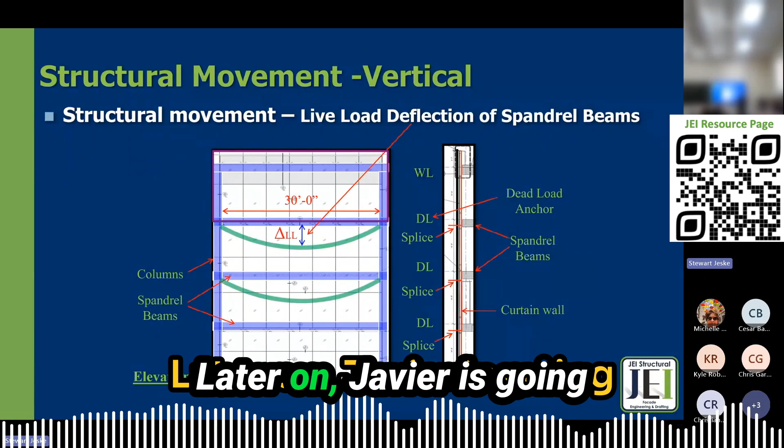Our glazing systems have got to be able to accommodate that type of vertical building structural movement. Later on, Javier is going to get into lateral building structural movement and some of the issues associated with that, and limitations of manufactured systems.

This is one of the areas where we can see that in this slab, somebody has done a good job of showing that at the edge, there is deformation. So if we have sticks in there for that—I think this was a Kawneer reference—you can see out in the middle, it might be deflecting. If this is 30 foot, out in the middle it may be deflecting up to an inch.

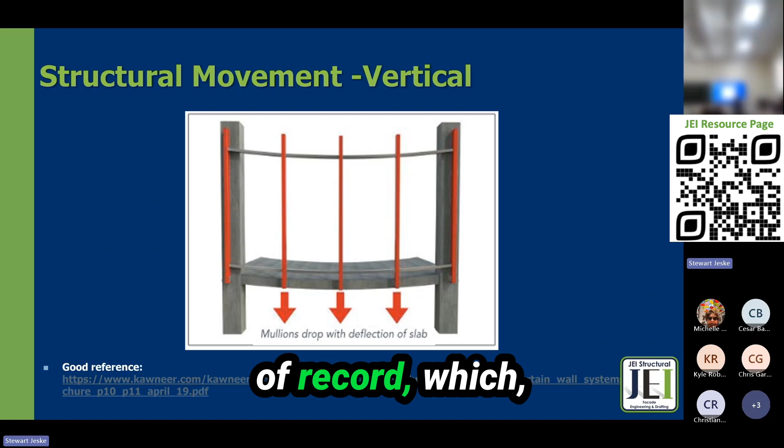That's what structural engineers of record designing buildings are allowed to design, and it's called L/360. Unfortunately, a lot of the glazing systems are not really designed to accommodate those types of movements. The structural engineer of record—that's my background. I came from Burns McDonnell, one of the major players in structural engineering around the world and in the US, and I spent 7 years designing building structures. I was clueless about any of the requirements from manufactured glazed systems and what they require in terms of accommodating that building structural movement. Had no clue about it.

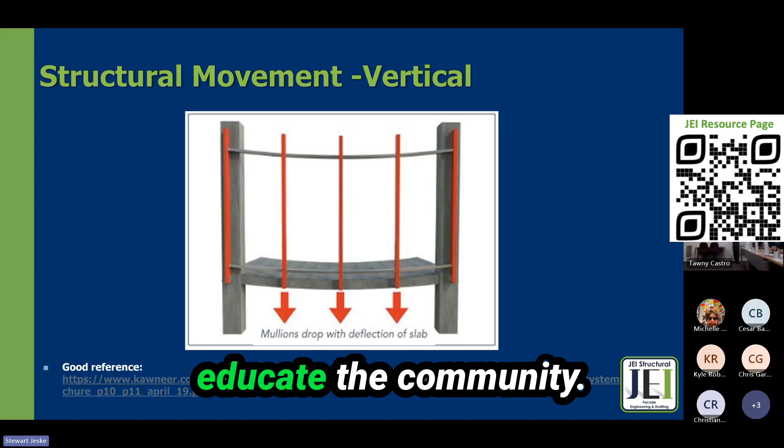So I'm letting you know, building structural engineers around the US, we've been in this battle. We engage in it to try to educate the community, architects and structural engineers and glazing contractors about the limitations of glazing systems to accommodate that.

So if we have a vertical structural movement of that beam where everybody runs over and it moves down, we have dead load anchors at every single floor. That means that this whole section of curtain wall that is supported by that dead load anchor all has to move down 1 inch. If it's a 30-foot beam, the structural engineer of record may have designed for L/360 for that 30-foot span. It may be 1 inch.

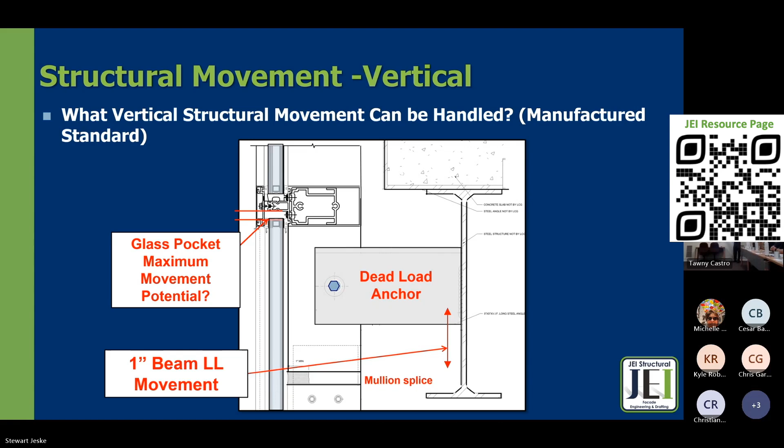So we might be able to accommodate it in that expansion splice, but what is the actual limitation associated with the glazing pocket? That's a big key. So for a stick-built system, does anybody have an idea of what that limitation might be for a standard off-the-shelf stick-built system in terms of structural movement accommodation? Half inch, 3/4—good guesses. It's actually a 1/4 of an inch.

This is the standard of every single stick-built manufactured system that is out there. They don't spell it out on the websites. It's not spelled out very much at all. It's something that you really have to dig for in small print to find out what the limitation is. So let me tell you right off the bat that if you have a dead load anchor at every single floor and you're counting on this to be able to accommodate 1 inch of movement, that's not happening. It can't happen. This is the big misunderstanding of structural engineers of record, architects, even glazing contractors, and a lot of manufacturers. It's not matching up.

We're trying to help in the industry get this information out there and make it available to project managers like yourself so that it doesn't get in the way in the future of the project. For unitized, it's much different because at each floor there's an area where we can accommodate, and that's much more movement that it can accommodate—3/4 of an inch up to 1.5 inch of vertical structural movement.

In addition to that, it's much better for in and out of the page lateral structural movement that Javier is going to talk about. But if we're not dealing with unitized, then we're stuck with what the manufacturer has in terms of being able to accommodate, and that's a 1/4 of an inch. All their details, even their head details, where you see a half an inch joint, it can only compress that joint to 1/4 of an inch. So all those standard details that you get off of their websites are built for 1/4 of an inch maximum structural building movement. This is a quote from a manufacturer.

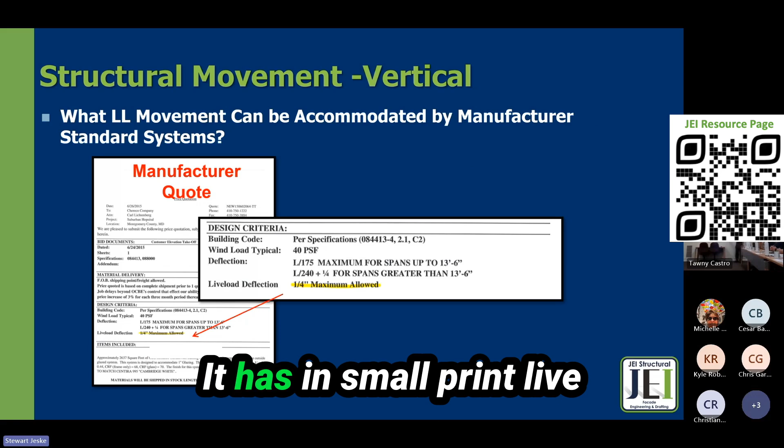It has in small print, live load deflection, 1/4 inch maximum allowable. This is off their shop drawings. One of the manufacturers has shop drawings with notes in the small print stating it's not to exceed 1/4 of an inch. It's out there, all of them are prevalent with a 1/4 inch max.

So what are the solutions that we can offer from an engineering standpoint to accommodate building structural movement with a stick-built system? We can stack the system. These joints that we have in there, the splice joints, become butt splice joints. They carry load vertically down through, all the way to the bottom or an anchored floor. We can do this for probably about 3 to 4 stories before it becomes too much load to handle.

All this needs to be coordinated with the building structural engineer of record because they need to plan on what those loads are where we're stacking it. It might be the 4th floor that we stack on and load, so they need to know what those loads are. What it also means is up at the top, it can expand all of that distance into whatever we have available to make that movement happen. We need to really plan for that joint up there because it's going to gain a lot of expansion from building structural movement. If it's a roof, that roof is going to move up and down for those roof beams as well.

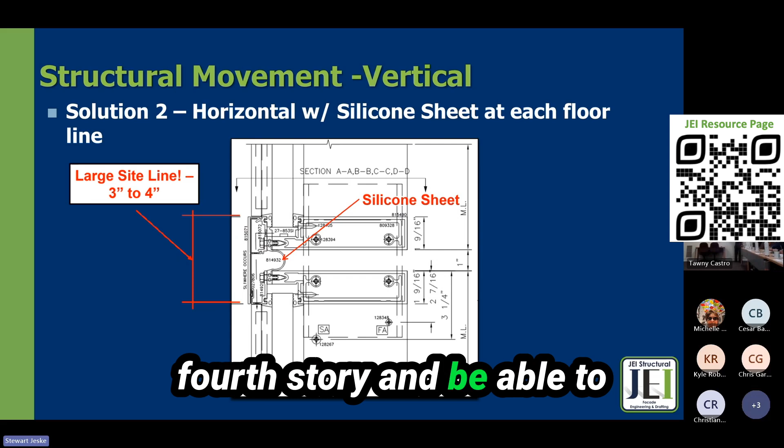One of the additional solutions we've found along the way is some manufacturers of stick-built systems are starting to understand the problem. So they're coming up with hybrid types of joints to use every 3rd or 4th story, accommodating that building structural movement with a flexure type of joint, a silicone type of seal. But this is really unusual, and you have to dig for those types of details if you have a problem like that.

So for unitized systems, it's very easy. Like I said, you can dead load at every floor, and it can accommodate that type of movement. What about at the head?

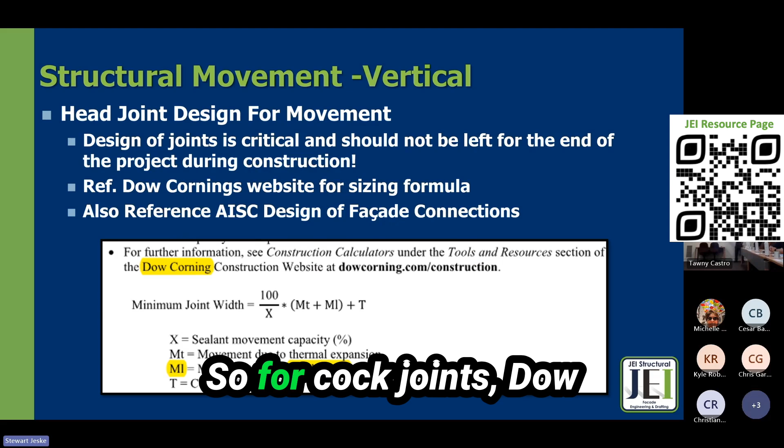So for caulk joints, Dow actually has a formula for calculating the actual width and thickness for that type of building structural movement. Ultimately it works out to be about 2 times the movement. So on a 30-foot beam, we have 1 inch of deflection because the structural engineer of record didn't know the limitations of a glazing system, and 1 inch is the amount that joint wants to move down. You would have to design a caulk joint of 2 inches to accommodate that in compression so it only compresses 50%.

The architect isn't going to accept that. And that's part of the issue we have to get into early on a project, to show that there's got to be some different solutions worked out for building structural movement. It's the number one misunderstood area associated with glazing systems and manufactured glazing systems.

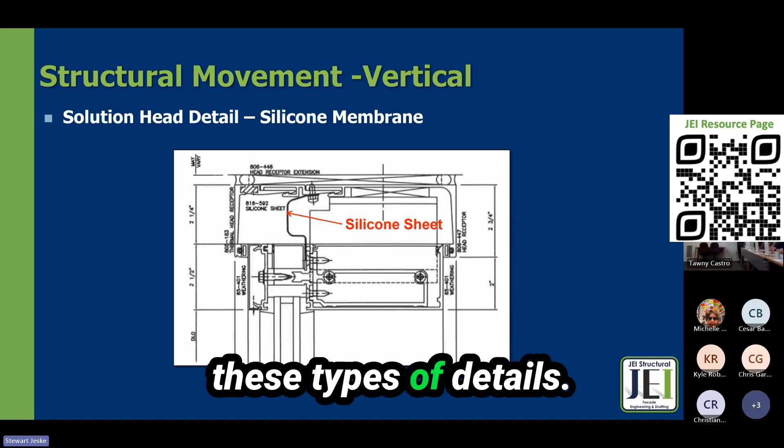Another option is Emseal. That can be used, but it's very expensive to use EM seal in those large movement type joints.

So what about storefront? What are the limitations associated with standard off-the-shelf storefront systems? This is a 21 foot 4 inch long area of standard storefront. Does it require a movement joint at the head? It looks like this, with hard shims at the top. Does it accommodate building structural movement? Does it accommodate this steel and the cold form steel coming down on top of that?

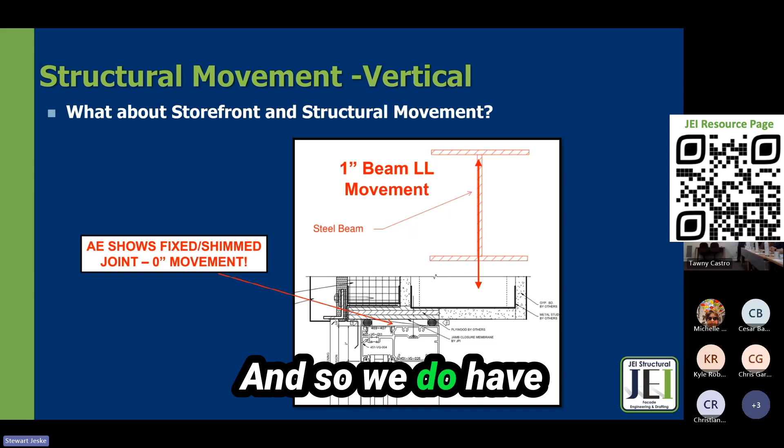No. The architects always show this detail with just standard tight shimmed conditions without understanding that it's got to accommodate building structural movement 95% of the time. So we do have some rules of thumb that we've developed.

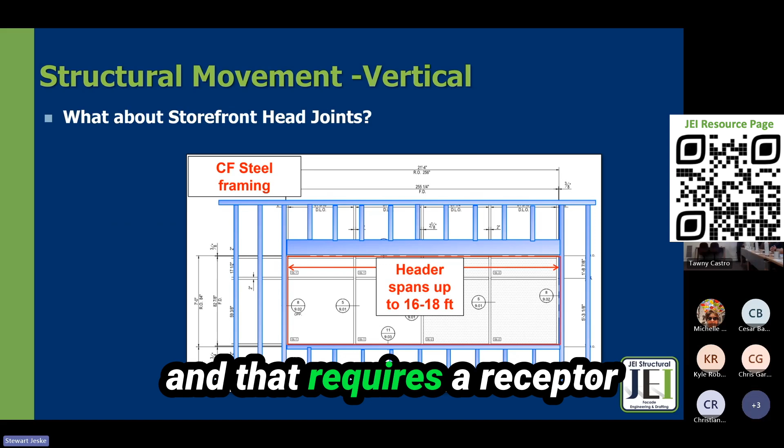This is an instance of cold form steel framing. You can see there's a header that spans across. The maximum span for cold form steel headers is about 16 to 18 feet. So anytime storefront is longer than that, underneath or in the middle of cold form steel, it has to be supported off of a beam above that moves, and that requires a receptor head for your storefront.

This is one of the conditions we see very often, where storefront comes in up underneath a beam that supports some frame out. This requires some type of movement accommodation. Unfortunately, it's not shown right—it's shown solid by the architect, and that's in error. It does require a receptor head at that location.

A receptor from a manufacturer typically ranges in capability of handling building structural movement, usually about plus or minus 3/8 of an inch. That's the maximum amount a receptor can handle.

So again, whenever we enter a situation where a structural engineer of record has designed a 30-foot long beam for L over 360 and we have 1 inch of movement, will a receptor accommodate that? It's not going to accommodate 1 inch of downward movement. So something needs to happen up front, early on in the project, to get attention to that issue. Otherwise, we can have major leaks.

If there is that actual movement, where people come over to the edge and are all looking out, it will be an immediate item where something will break—a seal will break—but then people go away, the live load goes away, the seal is broke, and people are running around thinking, why is it leaking? We don't understand what's happened. The problem was it wasn't designed right—it wasn't designed for the building structural movement. Almost 90% of the time, that can be tracked back to an improper design.

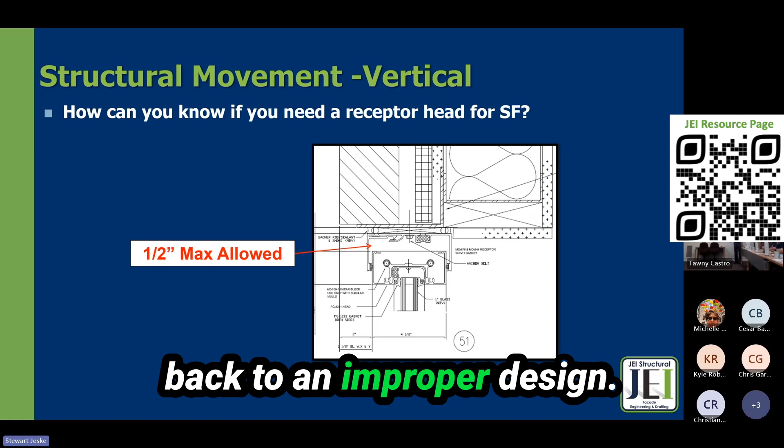Some rules of thumb for storefront receptors: if there's a canopy overhead over that storefront, most likely it needs a receptor, because that canopy is going to receive a lot of loads and move it back and forth. If the opening is longer than 18 feet in horizontal area, its vertical movement requires a definite need for a receptor head.

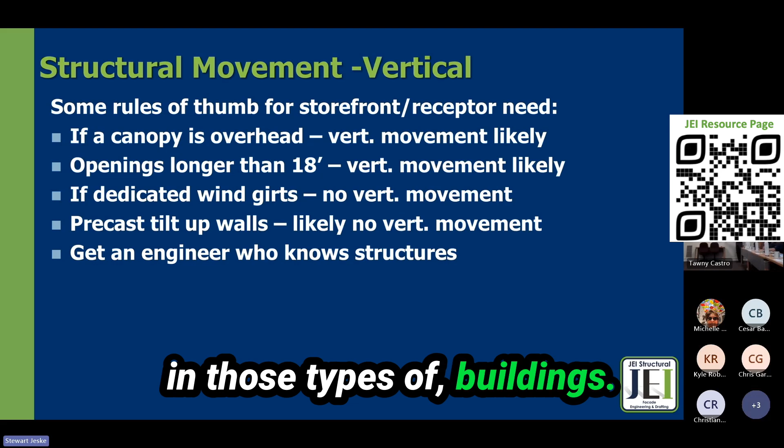If it has dedicated wind girts—in other words, a beam that is just supported without supporting the floor, that's a wind girt—it does not need a receptor. Precast tilt-up walls, you don't have to worry about receptors in those types of buildings. Ultimately, an engineer really needs to be looking at this from a structural perspective: what did the structural engineer of record for that steel building or concrete building design for? If it's not spelled out in the structural notes, it really needs to be investigated.

So with that, I'm going to go ahead and turn it over to Javier. He's going to talk to you about lateral structural movement.

Thank you, Stewart. Sorry, I think I advanced. There you go. Can everybody hear me all right?

Yes. So, for story drift, the West Coast is the highest seismic area in the United States, and part of our delegated design review includes making sure that when there is drift during a seismic event, our curtain wall can accommodate this drift without causing the glass to fail.

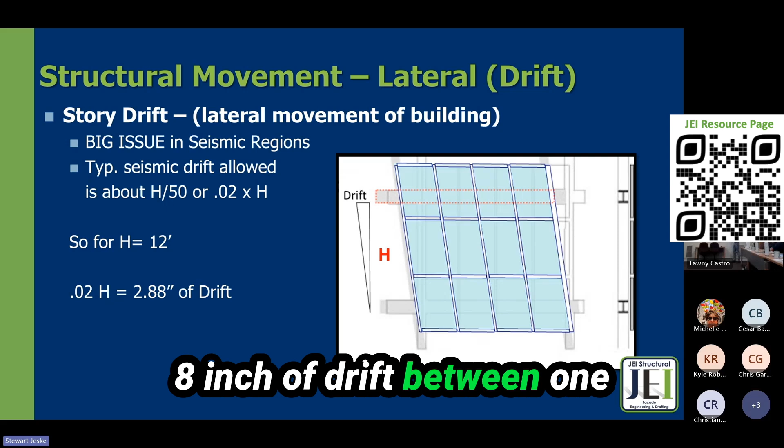The building code allows about 2% of drift from one story to the one above. It depends on risk category and the type of construction we're installing the curtain wall on, but 2% is a very common number. So for a 12-foot high interstory height, you would expect about 2.8 inches of drift between one story and the one below. So what does that do to our glass?

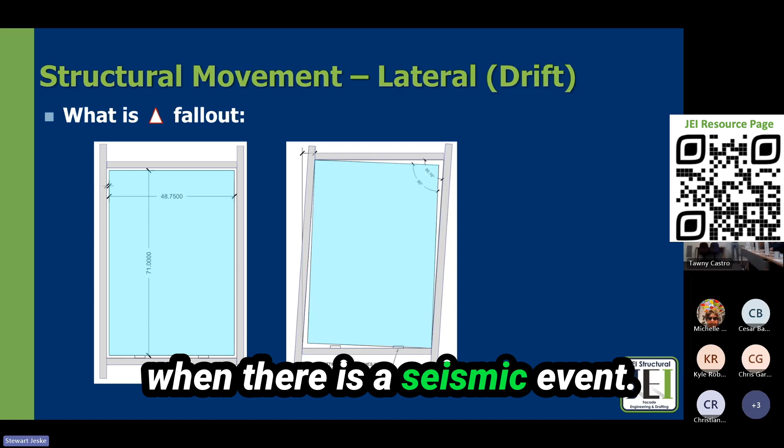Like this. So our review needs to make sure the glass doesn't come in contact with the aluminum frame when there's a seismic event. The reason behind that requirement is that if it does, we run the risk that the glass might shatter, break, and become a falling hazard to people outside on a walking surface.

The ASCE 7, which is basically the Bible for loading in the US, has in Chapter 13 the equations and requirements for us to check this delta fallout requirement. There are locations where you could be exempt from that requirement. Again, making sure that this big piece of glass doesn't fall, break, and fall into a walking surface is what the ASCE 7 is trying to achieve.

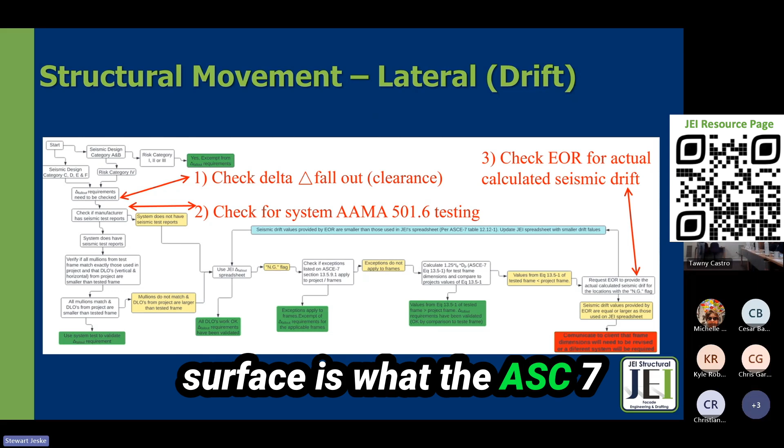At JEI, we have put together a very comprehensive flow chart, and it might be daunting to see this, but it's a very comprehensive approach to how we help our clients flag and tackle some of the high seismic areas as glass is getting bigger and bigger in locations where you might have 3-4 inches of drift. Stories are also getting taller. This flowchart was shared with a group of other structural engineers and PEs here in California, and it was validated.

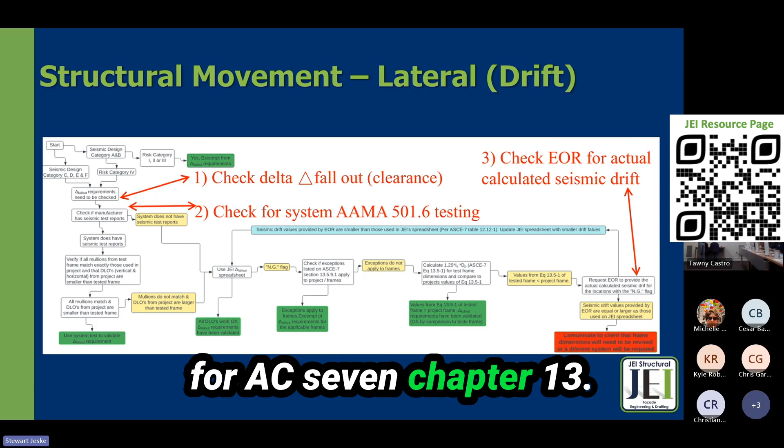We had the pleasure to talk with one of the committee members that sat on the committee for ASCE 7, Chapter 13. He told us this is basically the best way forward to tackle it. It's such a young industry, the glazing industry, that the seismic requirements are quite young. So it's upon the delegated design engineer to make a lot of judgment calls on these cases, but there is progress on the codes, and it's becoming a more prescriptive approach.

This allows us to take advantage of the testing that is done on a lot of the systems that are manufactured. I'll show a video after this slide in which a frame is tested laterally and racked dynamically. If there's no glass that either breaks or falls off the frame, then the system is good.

The problem is that many times on a project, the sizes of glass, the DLOs, are quite a bit larger than the tested frame, or the mullions might be slightly different. So if that's the case, we can't really extrapolate the results of the test. We have to find more creative ways to validate that glass.

JEI has internal equations that reference the ASCE code, which we use to prove out, based on equations, if the size of the glass has enough clearance around the perimeter to allow the frame to deflect without the potential of the glass coming in contact with the frame.

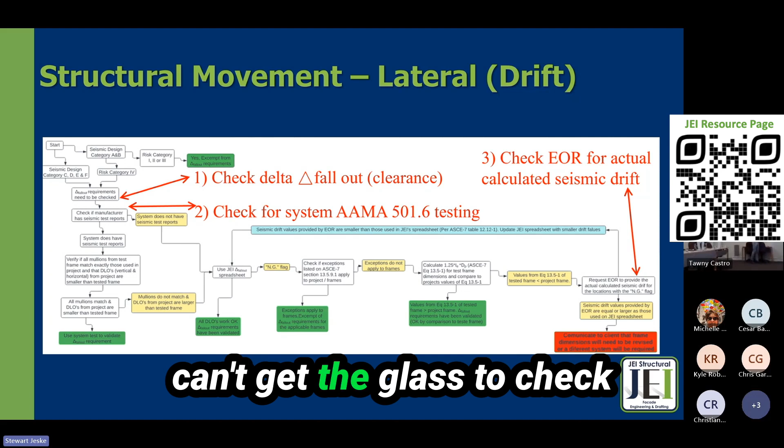If for whatever reason our glasses are too big and we can't get the glass to check out, we have yet another set of creative approaches to engage other types of equations to prove it out. If all else fails, we have a template of an RFI that we can send to the structural engineer of record and ask them how much drift this part of the building is really seeing.

There have been times that the response was, yeah, we have allowed a 2-inch floor drift in this location. But there might be other times that this particular part of the building is quite more rigid and it's not going to drift as much. That RFI basically gives us a thumbs up to proceed with those sizes of glass.

A couple of exceptions I have seen to proving out a very big piece of glass: if the glass is installed 10 feet or below a walking surface, we don't need to worry about it. Because imagine if this big piece of glass breaks during a seismic event and falls from the frame, it's not really going to hurt anybody walking.

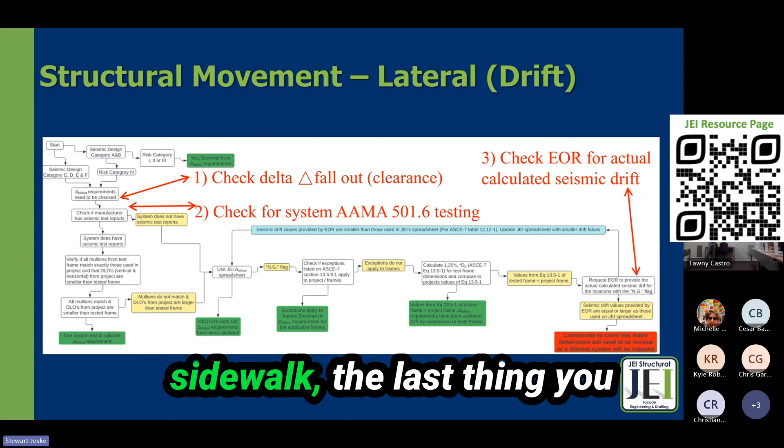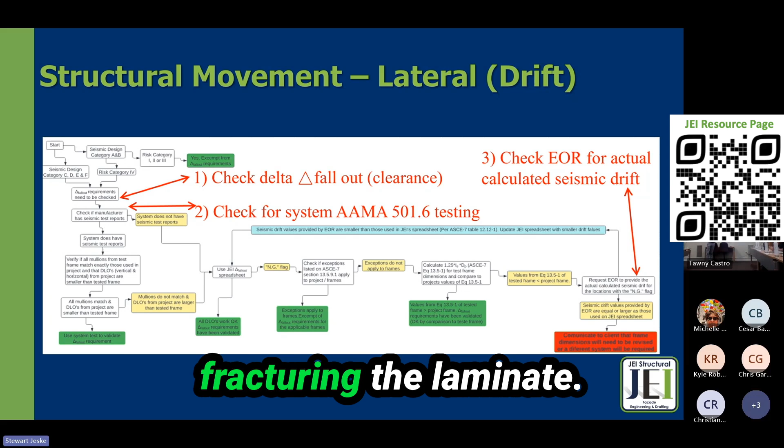But if you have this piece of glass 3 stories up right outside the sidewalk, the last thing you want is people rushing out of the building during a seismic event and then having glass raining on them. We really don't want that. Another solution would be to use a laminate, outboard or inboard. That way, if the glass comes in contact with the frame and ends up fracturing, the laminate captures the glass pieces in the frame so you don't have that falling debris hazard.

This is the AAMA 501.6 testing that a lot of the big manufacturers use to test their systems, and I'll play this.

0.6. That's 0.6. Oh, no. 0.4 is static. 0.6 is dynamic. Might have to. Oh, do it from there. Oh, there you go.

Unitized systems have a lot of advantages for this type of movement, and I'll share that slide in a little bit. But here's a video of that test.

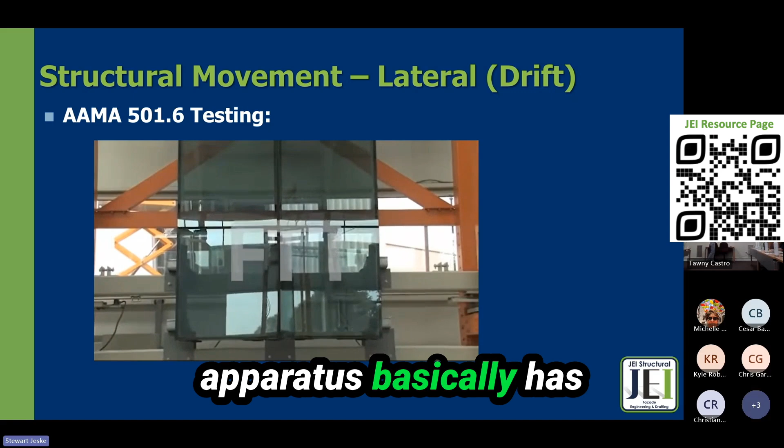You can see the testing apparatus basically has one part of the frame static while it racks the other one, because if the whole building moves equally, there's no differential displacement. It's the differential displacement that really causes problems with the glass.

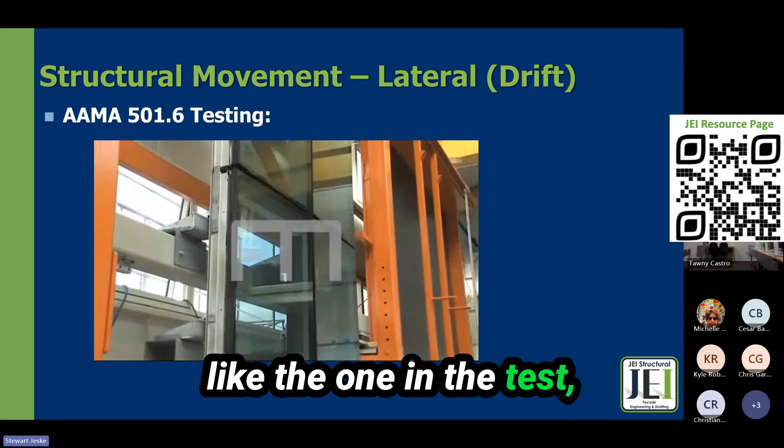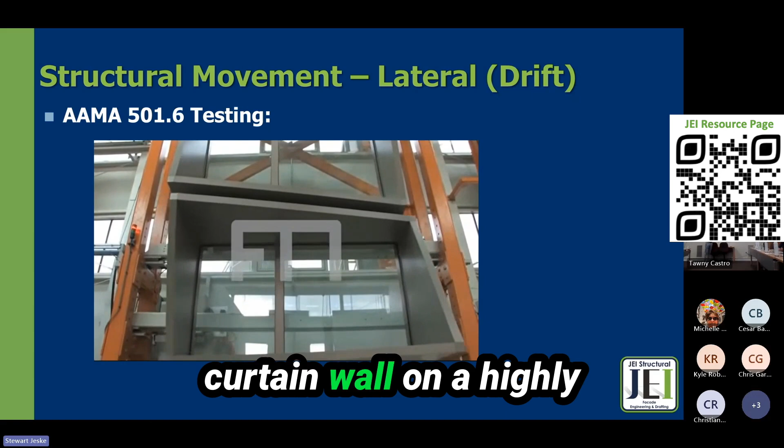I want to add that SSG systems, the ones that are not captured like the one in the test, there are very limited equations and analytical approaches we can take to validate those systems. Most all SSG curtain walls have to be tested for us to validate them. Whenever we see an SSG curtain wall in a highly seismic area, one of the first things we help our clients with is requesting test reports for those SSGs, because without them, there's really not much we can do on the analytical front.

Like a 4-sided SSG, correct. If it's captured at the head and sill, some mullions on the verticals do have a little tongue, and at the bottom they have little chairs that hold the glass. But what's preventing the glass from coming into contact with the other piece of glass is a silicone joint, many, many times. So those would need to be tested as well.

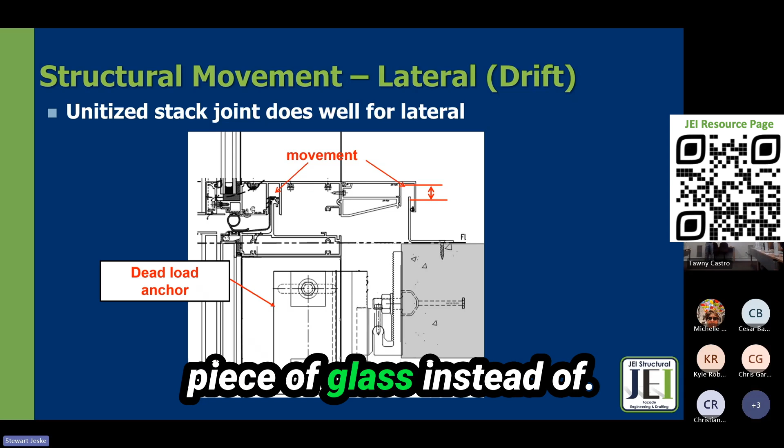For a unitized system, like Stewart mentioned before, the drift of the unit above it is not going to engage the unit below it, so it can slide with respect to the unit below. This is one of the great advantages of unitized systems in highly seismic areas: each panel can deflect without engaging the one below. Thus the big glass remains square and just rides along instead of being crushed by the rhomboid shape of the aluminum.

A slightly different topic - you want to talk about the genesis of the fins? You've had a project with some fins that occurred. Here's an issue I've seen from my years in the glass and glazing industry: manufacturers started out not envisioning anything that looks like a sail hanging off a curtain wall. They didn't start that way.

This concept was developed from architects wanting to add certain shade into the building, and they did it without really consulting the manufacturers. Ultimately, this is a big sail. Whenever you add these things on, each mullion collects wind load from that sail, and it wants to move laterally, which bends the mullion in the weak axis along that connected axis.

Usually in the specs there's a limit for the contract that it only deflects L over 360 of the clear span, or an eighth of an inch. So if you have a 12-foot tall mullion, it can only deflect laterally 1/8 of an inch due to this wind load pushing on each one of them. This creates a nightmare from the engineering standpoint, so that the glass doesn't break.

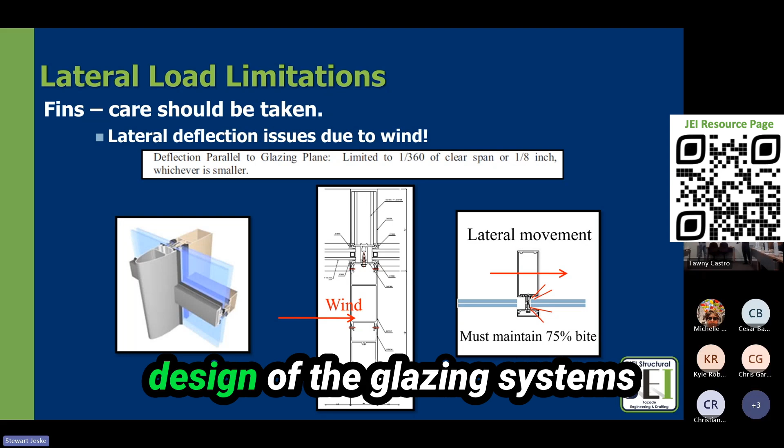This needs to be communicated with the architects early. The earlier we get involved in these types of projects, the more we can help out. But if it's left to the tail end where the delegated design is, it's a crazy concept. Architects have left the design of the glazing systems all the way to the tail end, and it creates issues whenever there's things that are caught. So get it in as early as possible.

Another crucial item, something we had to deal with in that project recently, is the amount of torsion that the mullion sees from that load developed on it. We can reinforce the mullion with a lot of steel, and we can prove out that the mullion works. But now that load has to be transferred to the structure. If we have a concrete slab, I wouldn't worry too much about it - we might just need to space our anchors a little bit more.

But if the substrate is an 18 gauge or 16 gauge stud, the light gauge metal is typically also delegated, also part of the delegated design. So the communication to the engineer that designed that gets a bit longer. We have to jump more hoops, but we need to let the engineer that designed the header of those studs know that now you're not only looking at a perpendicular load from wind, but there's also a huge torsion load that can be induced, very high.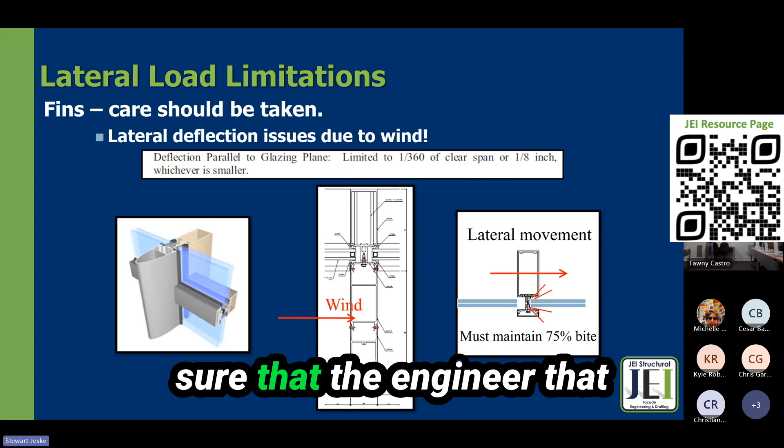So that's something we want to put up in the drawings and shop drawings with big bold notes: reaction loads from wind are this, and from torsion are this, making sure the engineer who designed that cold form steel is aware of this. Like Stewart was saying, bringing the delegated design team in as early as possible can prevent so many headaches from these architectural additions to the curtain wall.

With that, I'll send it back to Stewart. Definitely something to watch out for in the future as architects become more and more creative with things they want to do for shading, interior shading, and energy.

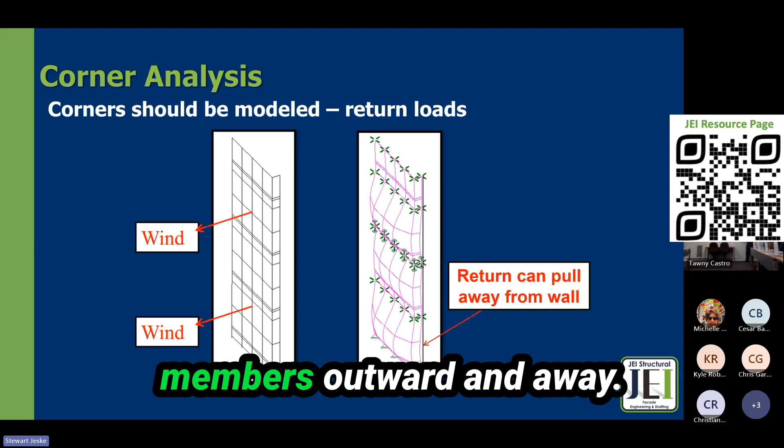Another specialty area you really need to watch for is short returns on curtain wall. In other words, if you have curtain wall out here that makes a short return, dead ends into the building, all of this from wind suction can actually deform this joint where it tries to connect into that building, and it's usually a sealant joint. Now it becomes a movement joint because it's trying to deflect these members outward and away. That needs to be looked at carefully because there can be a lot of movement in those types of joints.

Typically, if you go out to buildings and they're complaining of moisture problems, most of the time it's these short returns. You can go out, look at the sealant joint and say, oh, well, it looks broken. And so a lot of stuff leaks in through those areas if it's not designed properly.

Another gotcha area: most of the time whenever we have curtain wall mullions, they're very movement oriented, very flexible with the wind. And usually what's adjacent to it is very, very stiff, doesn't move at all in the wind. So this becomes a joint that needs to be designed for that differential movement as the curtain wall moves in and out of the frame of that stiff area. This has to be able to take that movement without breaking the seal.

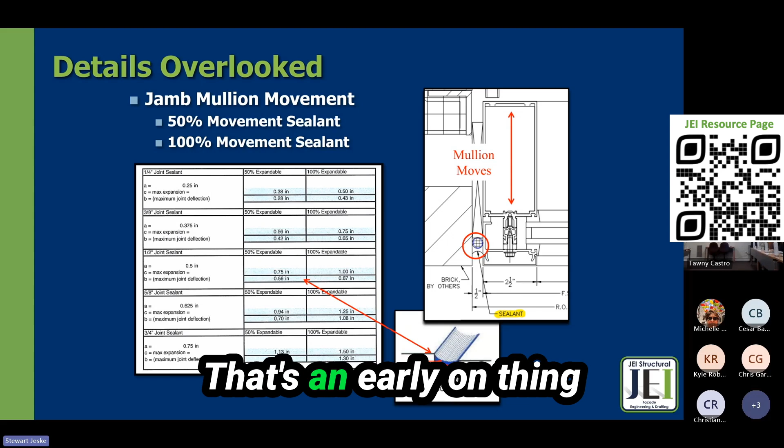Again, it's another number one area we see as a deficiency. A lot of engineers aren't paying attention to this typical half-inch joint. If it needs to grow larger because we've got a very tall span of curtain wall that's moving back and forth, that's an early-on thing we can identify.

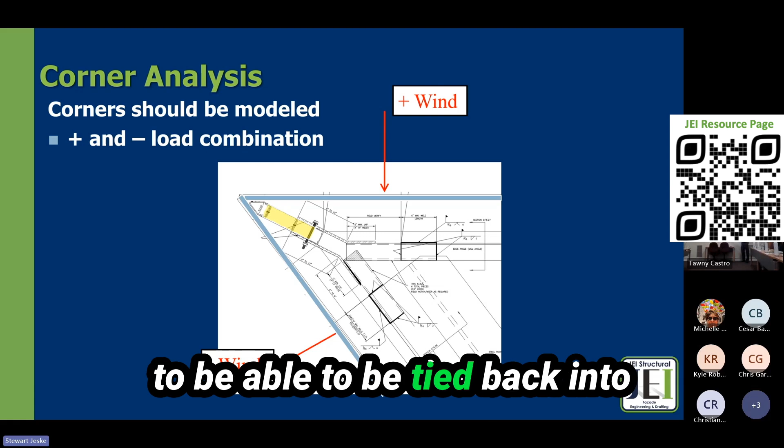In addition, corners need to be looked at closely because a sharp corner actually receives wind load that is positive and wind load that is negative. It contributes to the bending, the weak axis bending, of the mullion out there at the corner. That's a real critical area that needs to either be reinforced heavily to avoid that type of movement so it doesn't bust the glass, or it needs to be tied back into structure more often than the regular wind load clips.

Be very careful with some details where we want to run horizontals through. It's easy to think of those as solutions, but it might impact the building structural engineer of record. In longer situations like this where we want to run a horizontal through, if we have cold form steel designed by the structural engineer of record as a jamb member over there, and we're trying to load into it, that can be a decent amount of load. The structural engineer of record might look at it and say, wait a minute, what are you guys doing? I didn't design for that. You're loading my cold form steel member now, and that's too much.

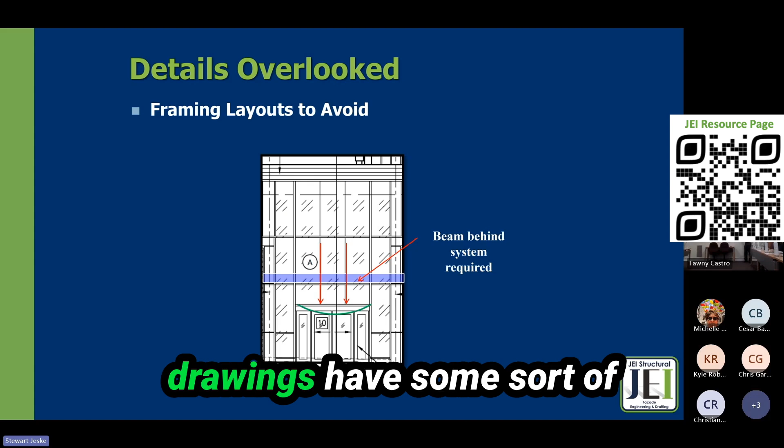Some of the framing layouts to avoid or be careful with: whenever we have operable doors or larger openings, we definitely want to make sure the structural drawings and architectural drawings have some sort of support system behind it. Getting that early on can save a lot of headaches, because there's a lot we have to do to carry large loads over this thin member in a weak axis, supporting vertical loads plus wind loads, since other mullions are dumping wind load into it laterally. This becomes a very difficult horizontal mullion to handle those loads, even with heavy reinforcing, so this needs to be looked at early as well.

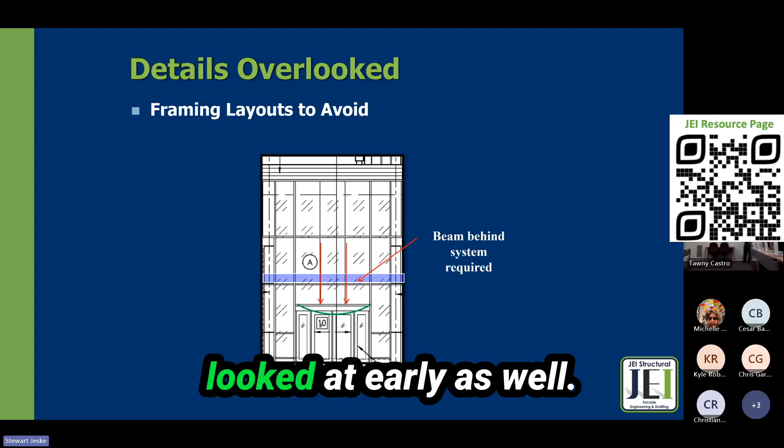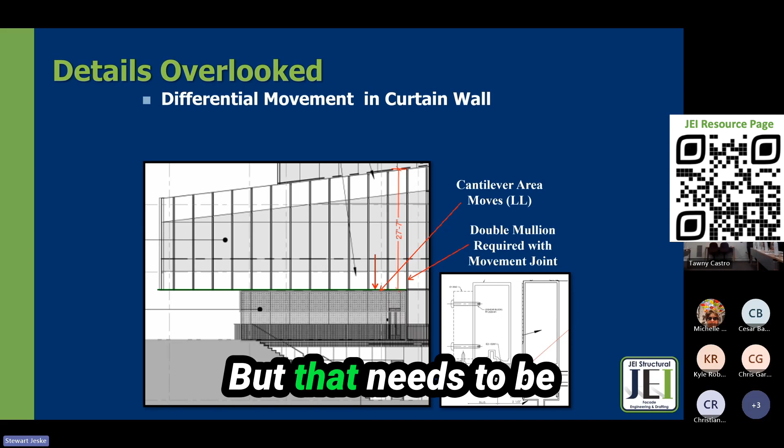Usually that's done with a faux mullion—you set a mullion that's SSG back behind it, with a joint that separates it. Usually the architect doesn't mind, but that needs to be discussed early on in the design concepts associated with the framing layout.

Connections to avoid: every once in a while we see an improper connection proposed by detailers, connecting into the lower third of a structural beam. The reason you don't want to do this is that many of these beams on the outside of the building structure often don't have lateral support. We can throw so much load into that beam that, without lateral support, it can twist the beam and potentially cause failure of that member. Something to look out for. You always want to load in where the structural engineer of record shows it in the structural drawings, usually on the bent plate pour stop or up in the upper half of the steel.

So we've covered a lot of different things—some gotchas, the biggest one being building structural movement, and some of the other stuff. What questions do you have for us? We'd love to share and answer some questions.

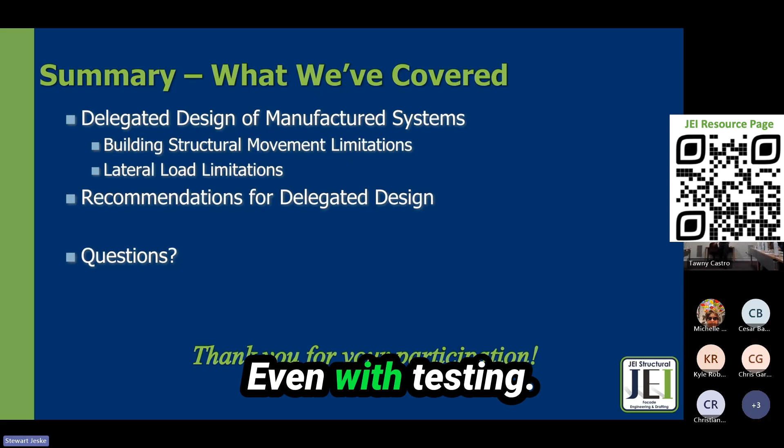So you're saying the building codes for the city are resisting SSG type applications—they don't want to allow that at all. Is that due to seismic concerns associated with it, even with testing? Not four-sided, but a cassette system. We haven't really seen a lot of that yet, but is that even when the architect's design is calling out for SSG and the architect doesn't even know?

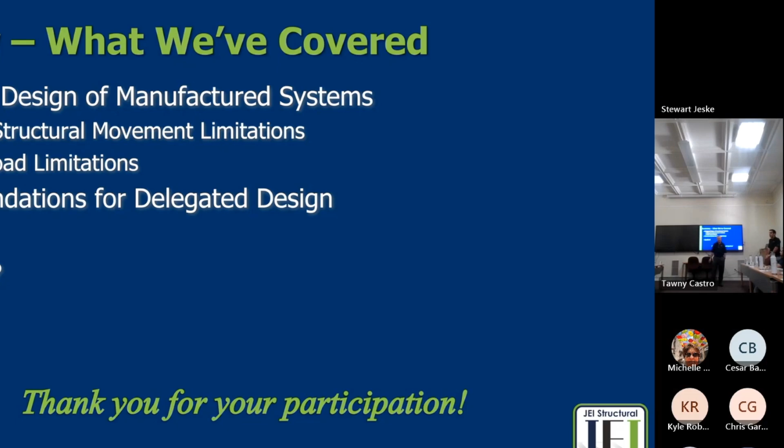Yeah, yeah. What we'd be interested in, though, is if you've got communication from the city associated with that—I'd love to see some communication about what they're citing, so we can be proactive in investigating that and advising clients. We've recently been involved in a project up in San Francisco that had some SSG applications, so I'm wondering if it's more of a local LA thing. That is interesting, yeah.

Anything with unitized? Have they flagged any unitized applications, or is it fine? Yeah, no, I'm not aware. I've got a card over there. I'd love to see it, he would love to see it too, so we can look back at what they're trying to cite.

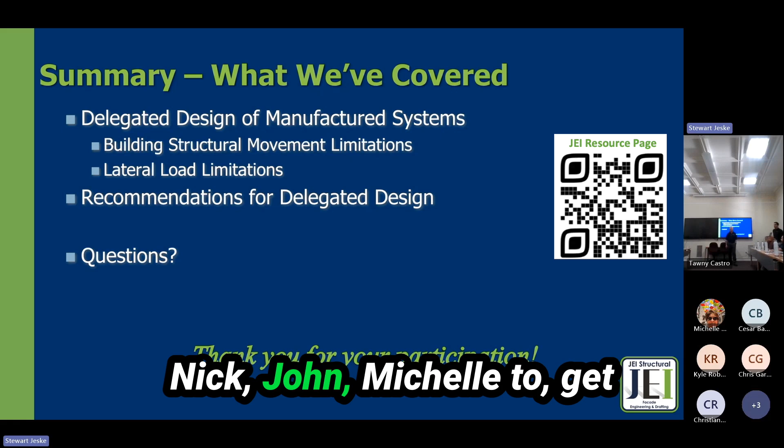Yeah, no, I can follow up with Nick, John, Michelle to get the conversation going. And like Stewart said, we'd love to, if you get that notice of rejection or whatever, look at it and see why it's being cited. Is it a sustainability thing? Here in LA they're big about making sure you install something that lasts longer than just a few years. I don't know if it's the sealant—maybe they realize the harsh heat environments here might dry it out.

That's how they had to thicken the glass too. But the captured system basically does the same as an SSG. We do have checks that say, okay, along the edge of the SSG there might be a little bit more flexible, but it's still four-sided supported.

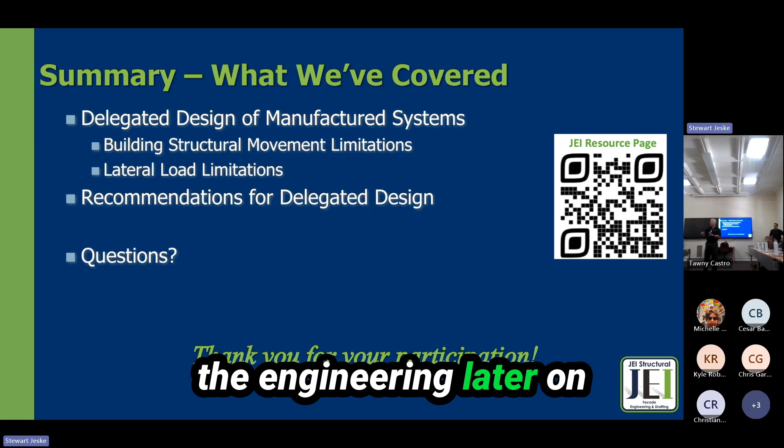One of our best ways of being able to serve clients is getting in early, so we can actually do design assist. We can break apart a quote into some really early design assist for a small amount and then have the rest of the engineering later on. Those types of projects flow along so easy and smoothly because we can look at the issues and problems up front. So we love to do that with our partners.

We've even offered a few times to share the building movement RFI template, so project managers can send it as soon as they send their proposal, even to the engineer of record, saying we need this yesterday because we need to know if we need head receptors. We need to know if we will need custom anchors, because even for curtain wall, you can't have a 3-inch head joint because your F&T anchors won't engage with the mullion. So now you're talking about having to do custom steel anchors with welds. The sooner the building movement is brought to the attention of the engineer of record, the better, and the savings are enormous in that sense.

If you're looking for an RFI template to just start the conversation, say you guys get awarded, we can send an RFI template over to you and it'll stay the same language. It basically spells out, hey, we need to know what the building structural movement is. If you're using L over 360, that's probably not a good thing, and it can spell out that there's limitations for manufactured systems, usually about half an inch. We can kind of guide that process early on. You can have the template, send it out in advance without even us, and you'll get answers back real quick. That's where we love to be an advocate for our clients.

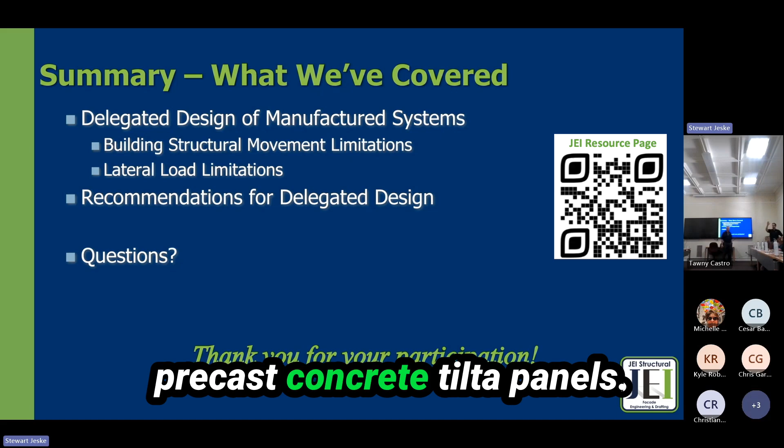And even a step before that, it takes very little time for somebody with a level of experience like Stewart and the rest of the team to look at a set of architecturals or structurals and very quickly be like, yeah, you're probably going to need a head receptor there. Or, oh no, it's all precast concrete tilt-up panels, you're good, it's just a punched opening, you don't need to worry about head receptors. So for those cases, you don't even need an RFI. We can give you a thumbs up saying we're quite confident you can proceed without the RFI, the head receptors, and that whole discussion.

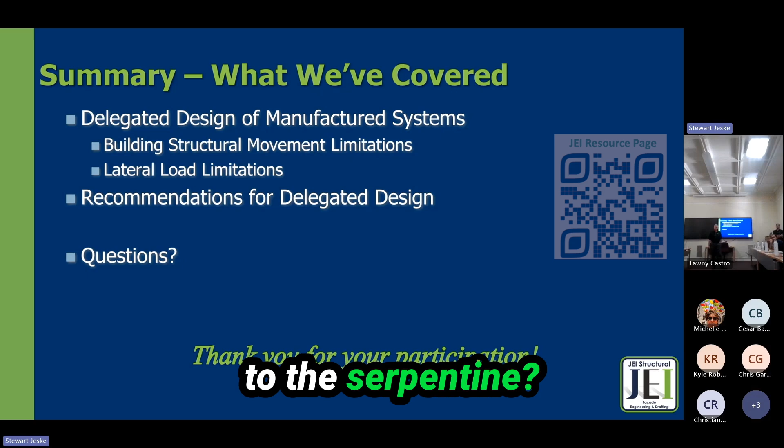Changing load values, so I'm assuming that deflections are being too conservative. Yeah, so a lot of times in our process with the RFIs, usually they'll come back and say, just, you know, it's this, and it's almost like a pat answer. It will come back and say, okay guys, this doesn't work with manufactured glazing systems, stick built, we're really needing to have some actual calculated building structural movement. That's whenever they'll come down, they'll outline it, they'll say, okay, over in this section it's a quarter inch, over here it's really about three-quarters of an inch, over here it's half an inch. So they get more detailed about it, they will come down. It's a process of working through that and trying to get the real answer.

Now, if the question was regarding wind load, some structural drawings do have the wind load pressures listed on the structural drawings. We do go through and compare those with what we have calculated in-house.

The heads of glazing systems. Let me back up to that area and I'll let Javier kind of talk about it. It'll be a similar type of situation.

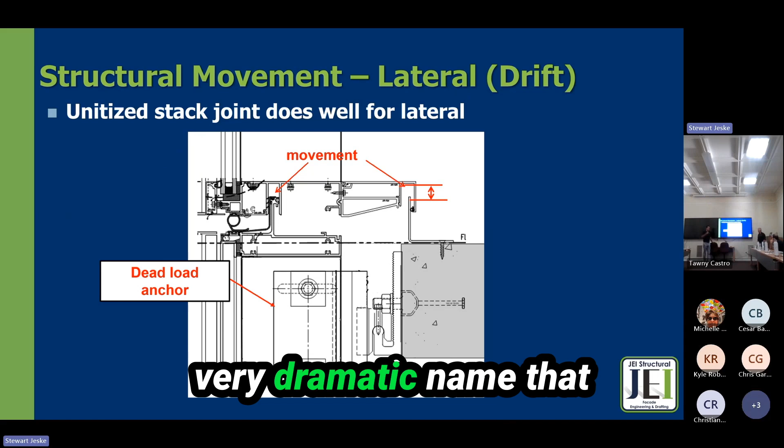The delta fallout is a very dramatic name that ASCE 7 chose, but it's not that the whole glass is going to fall out—though it could. They consider failure whenever the glass comes in contact with aluminum. When that happens, they call it failure, even though the glass probably isn't going to break. The code takes a more conservative approach, saying let's not allow any contact between the glass and the mullion tongues or whatever part of metal is close to the edge of the glass.

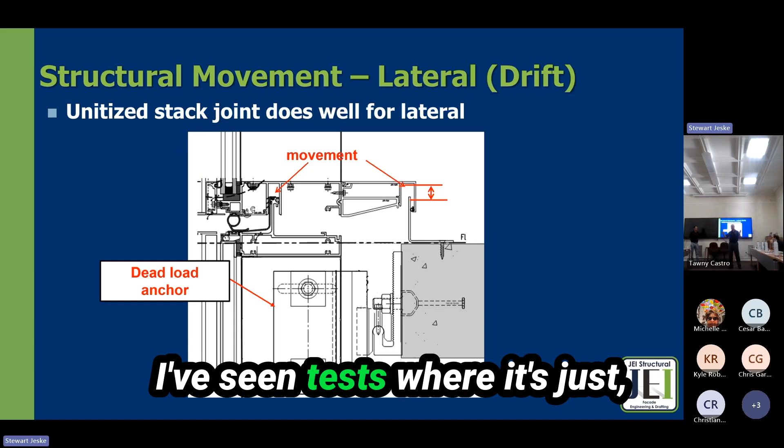In the lateral shake testing they do, you can actually get a lot more out of a system than you can by calculations, because there are a lot more redundancies built in, and it can actually contact the glass without breaking it. I've seen tests where the glass is almost coming out, and it's a miracle it's staying together—then at the end of the test it's all back to square, and it passed. But you can't get there with calculations alone, so it's always better to have those tests to validate.

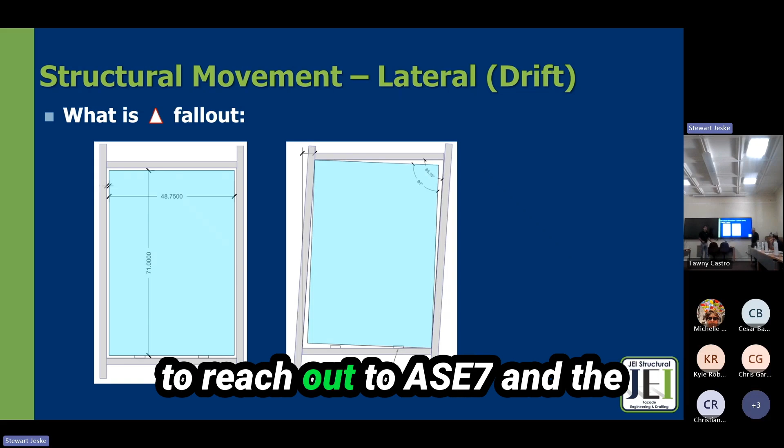Something that's been on our to-do list for a while—we wanted to reach out to ASCE 7 and the committee—because one of the things the equations don't take into account is that the glass always sits in two setting blocks. Our understanding of how the equations are written assumes the glass is just floating there; it doesn't account for the two setting blocks holding the glass. They don't mention that. And that does make a difference, because it's like a pivot.

The jambs—I'm assuming that's sort of like a receptor. I've seen that every once in a while, where they run storefront receptors over the head and also at the jamb. I'd say it's an unusual situation; I've never really seen it used much, but in high seismicity environments where you need extra space for racking, that could be a good possibility. Otherwise, I don't see a need for any type of compensating.

That jamb could actually impact the ability of the head receptor to accommodate movement. We had a project in Chicago some years ago where, because you have the compensating channel on the side mitered at a 45-degree angle so it can be installed with the head receptor, you end up locking that head receptor—it can't move because the comp channel on the side acts like a post. So you've got to be careful with limiting movement, since most movement is closer to the midspan of the opening anyway. But there might be a case where the compensating channel compromises the head receptor's ability too. We haven't come across too many compensating channels, though.

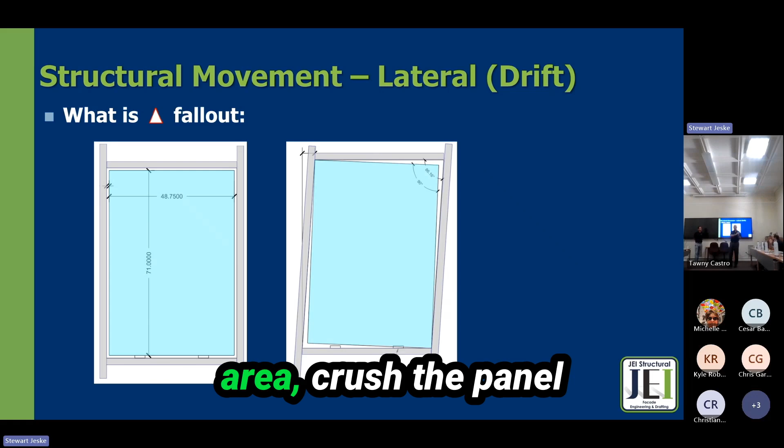A crush panel is usually at the edge of a building, where you have to allow for some very rigid systems to laterally move over into those crush panel areas. Usually it's thin metal, and it'll allow that movement into the area, crushing the panel versus crushing the glass. So it saves the glass. The panel crumples and can always be replaced, but glass isn't falling on people. That's usually the purpose of those applications.

The system shows test DLO is smaller than the project DLO, and all our formulas accept that. Will this apply to the two-sided SSG in order to avoid doing project-specific testing?

The vertical edges would be SSG, I'm assuming, and the bottom and top would be captured. I still feel that we can modify some equations to see, okay, there is this much gap between this glass and this other piece of glass, and we can take the C1 and C2 values based on that.

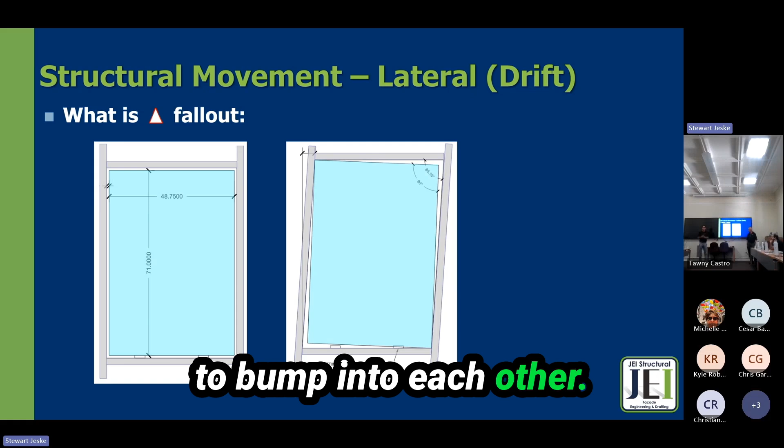Because I'm thinking while I'm answering, with SSG, after a seismic event, the building owner is going to expect some level of damage. They don't want the building to collapse or the curtain wall to fall, but they will expect there's going to be some seals and maintenance needed. So my approach would be maybe modifying the delta fallout equation so that instead of the clearance between metal and glass, we take this joint, half of the joint, to allow each piece to travel that much. Basically, take your glass, replace the mullion tongue by the glass, and say let's not allow the glasses to bump into each other.

So I guess, yes, we could somewhat find a creative way to modify those equations. This is proof that the seismic requirements in a very young industry like glazing and curtain wall are catching up. I'm sure in our lifetimes we'll see more advancements in the code that allow for more engineering, like analysis and rational analysis for those.

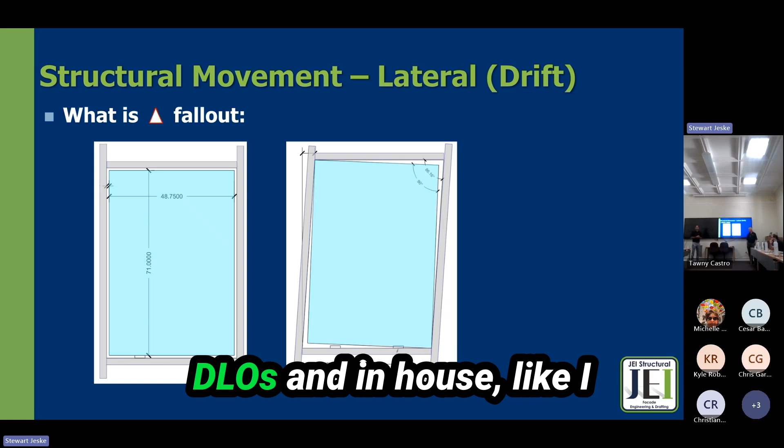Most SSG systems out there from the largest manufacturers have test values for those, and they try to test big DLOs in-house. Like I showed on that flow chart, if a project DLO is larger than what's been tested, we have some rational methods to try to extrapolate that result within certain limits, of course.

Any reductions, gotchas? Yeah, with glass guardrail. Yeah, anchoring into concrete would be one.

There's the omega, called the overstrength factor, which applies when you have a guardrail system where the base shoe is anchored directly to the concrete slab. We calculate our wind load pressures and seismic lateral load on that guardrail. Think about it, it's a cantilever, a 42-inch cantilever piece, and when the building moves, that thing's going to want to do this. The interior wind load pressures are minimal, or 5 psf. So we take into account the 50-pound per linear load from pedestrians, and the 200-pound impact load from somebody falling.

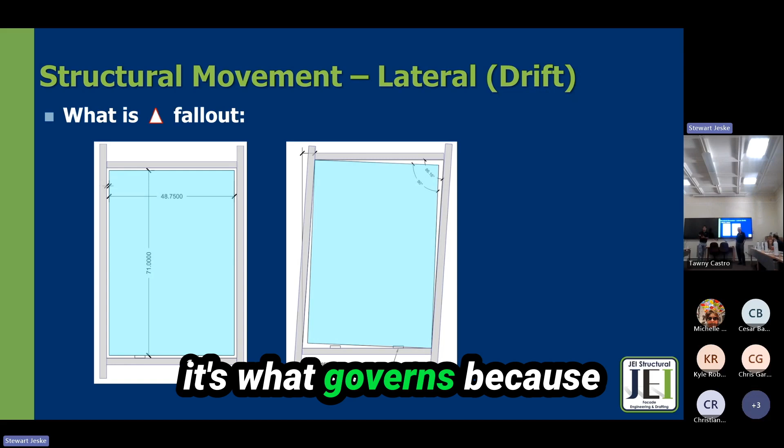But many times on the West Coast, we see that the seismic requirement on those bolts is what governs, because that omega factor, that overstrength factor I mentioned, the code requires us to multiply that load times 2, because they consider concrete a brittle type of failure. If that concrete spalls or the bolt disengages from the base shoe, it could be a very sudden type of failure. That's why they include that omega factor into those connections.

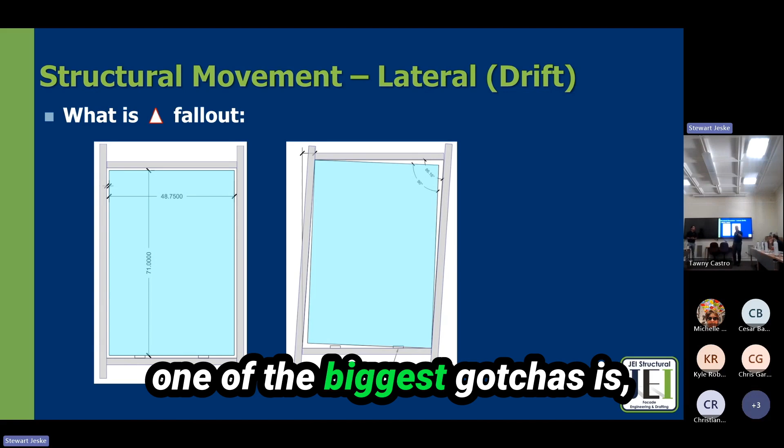So when you see a guardrail, Nick, you know about this, when you see a guardrail that's one inch from the edge of the concrete slab, stop, call us, get us involved, because that is definitely going to be a challenge. I'll add to that and say one of the biggest gotchas is don't believe the architect and what he has in the drawing. Don't believe that.

I'll add a little bit there as well. You really have to watch out for, it's most often required to be laminated glass. It just is, it's going to be laminated glass now. And architects are still getting up to speed in a lot of areas, so watch what's spelled out in the architectural drawings whenever you're doing takeoffs and stuff like that. Don't necessarily believe what's in there, because it's not right.

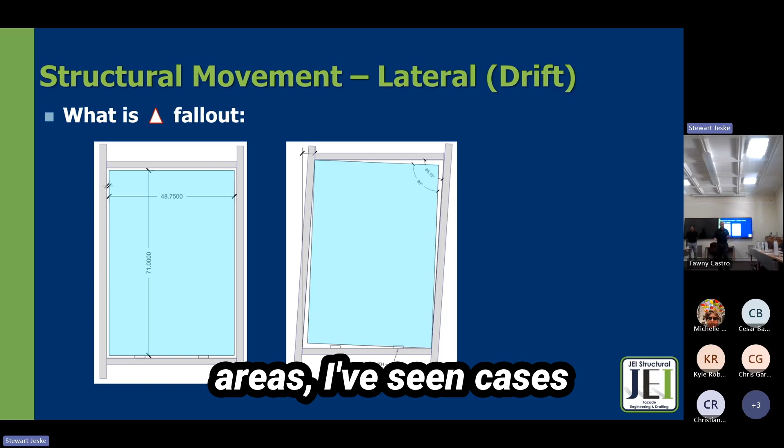Whenever you're in rooftop situations, here's a gotcha: I've seen cases where they want the handrail mounted flush with the raised floor system, so it looks frameless, just glass coming up through the floor. You have to watch out for that, because if you go all the way down, there's additional load to account for. The forces are larger when you're anchoring a longer distance down, and you really have to account for that in the thickness of the glass.

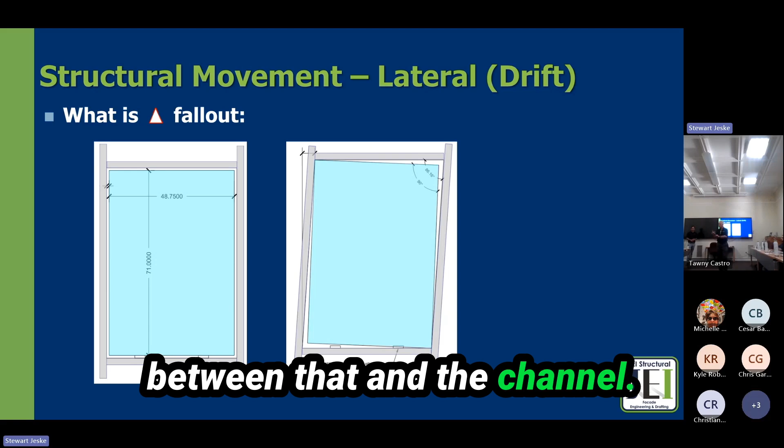Another gotcha on the rooftop system: when you're looking at the waterproofing membrane, you cannot have it in between that and the channel of the glass. I've seen architects call that out and say you cannot break the waterproofing membrane. Well, the thing should have been on a raised area to begin with, with the membrane brought up and out and anchored to the top of that raised system. Don't break it, because that will mess up your glass handrail, and somebody will say this isn't good, because it creates a cushion in there and it won't work.

I'd always recommend starting off assuming a 3/4-inch laminate would be required. 1/2-inch glass, especially exterior, seldom works. I've seen it work very few times, especially for point-supported glass. When you have spider fittings or offsets holding the glass, a 9/16 laminate or 1/2-inch laminate glass will 98% of the time not be sufficient due to stress concentrations around the holes.

End lights too, Stewart? Yeah, the top cap. Some systems have been tested, and they say if your top cap can't anchor to a substrate above, you have to limit the end light, because if the glass breaks, you don't want the top caps, which are quite light and not too strong, to fail and be unable to support the load that needs to still remain on it after the failure of that end piece of glass.

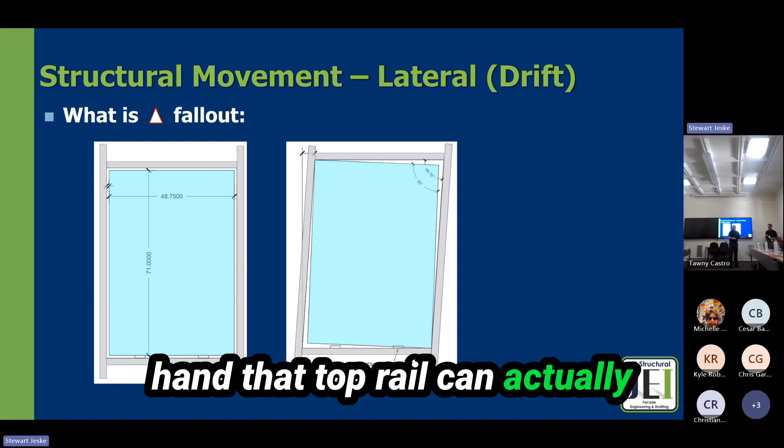Usually whenever you have the returns of an outdoor glass rail, they're returning into a curtain wall or something, and you can't connect it there. It's really preferable to have a connection to the wall at that return. That way you can run longer pieces of glass, but that return is confined to whatever the top rail can actually do structurally, because you have to account for the glass being broken, and it's got to take the full load of somebody impacting it without giving way.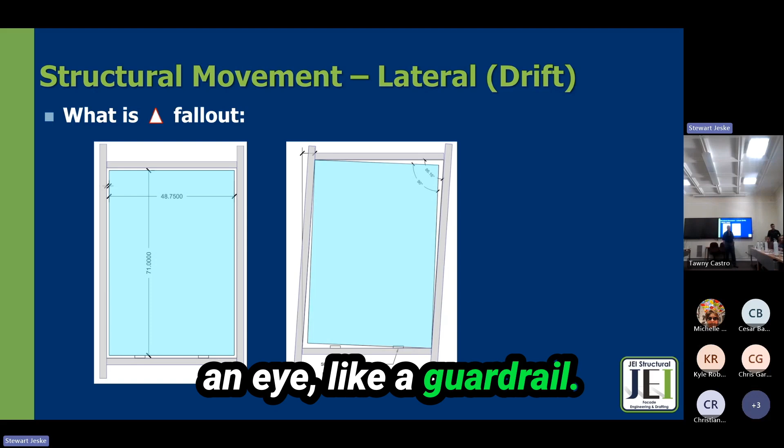Those are some gotchas, Stewart. I had a job at Children's Hospital with a shaped guardrail protecting from falling to the pool on the first floor. So how would you anchor that top cap?

It continues, right? It's continuous. Well, that actually anchors itself - you can model that, show that it's all fully connected. As long as there are welded or anchored systems along the way, and it's one continuous member, you can model that and show that it's capable of being curved glass. That's actually a pretty strong setup - nice. We wouldn't require any posts probably, it kind of anchors itself.

It's one rigid system, because right now there's an angle line, quarter-inch angle line, supposed to attach. But we sent out - I don't know if you've heard of GPRS - they came out, took plot points of everything with a data camera, and we identified that the angle bar is not at a true radius. So at some point I'll be off center from the angle bar, other points I'll be right against concrete, kind of floating all over the place.

So this engineer recommended we extend it, but we can't do that now because in some areas it's really tight, other areas it's still got a 2-inch gap. So now we're looking at attaching to the concrete. That's what I'm up against. Well, side mounts - we just did that recently, and it's an option. Concrete edge systems would be an option.

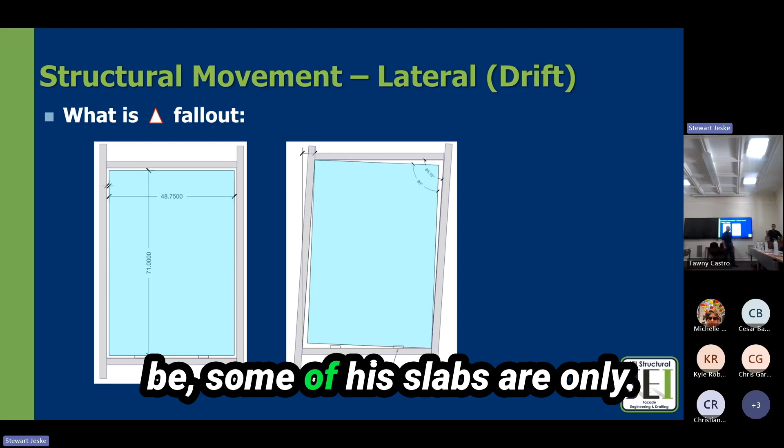Some of the slabs are only, especially if you have corrugated metal underneath like concrete over metal decking, some of those places are only 3 inches deep. And sometimes they use lightweight concrete for seismic reasons, which doesn't offer that much capacity for anchorage. The spacing, embedment, and edge distance is the number one limiting factor in concrete connections - you don't want to get too close to the edge.

It's up to us, so our sealed package will be conclusive for all the requirements. We haven't seen our approach flagged much. Yeah, I haven't seen a lot of that. Well, I mean it could, but yeah, haven't seen a lot of that.

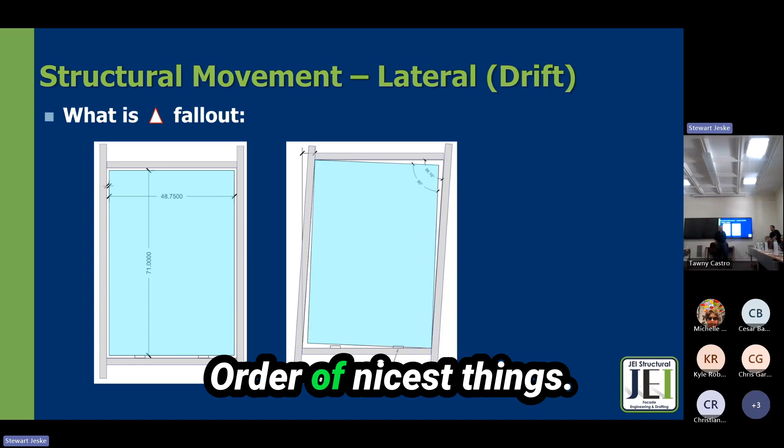Your engineering calculations - are these guys calculating PVB or SGP? Depends if it's exterior or interior. Pretty much always SGP on exterior. We did PVB because I know it's a little more expensive. For guardrail it could work.

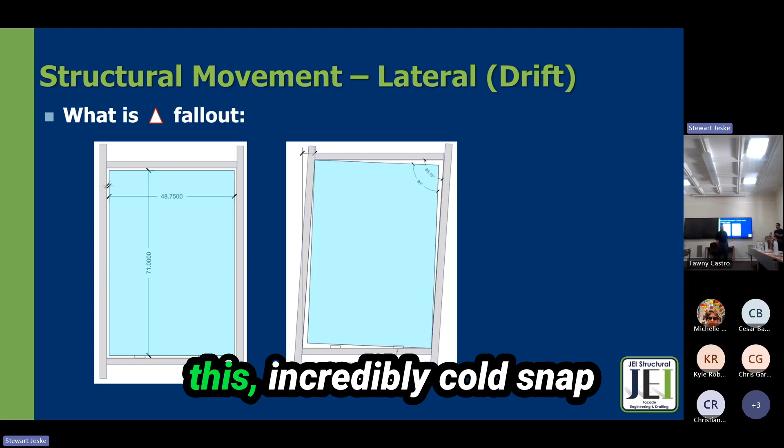I think one of the problems with SGP was sourcing it too. This is a crazy weather story - Houston got an incredibly cold snap about 4-5 years ago, and that derailed the entire SGP supply for the country. It froze all their vats, so one of the materials used in SGP got damaged, and our clients were just like, we can't get SGP, you can't source it.

But for interiors, I think PVB would be fine if it calcs out, we see no problem. It is weaker, obviously weaker. For glass breakage, it doesn't need to be SGP - PVB can still hold the pieces of glass together and keep it from falling on people below. That's what the real issue is.

The issue is whether it's strong enough to act with one ply broken in the case that it doesn't have a railing across the top. In those cases, whenever it doesn't have some type of rail across the top or something connecting, then PVB is not going to make it.

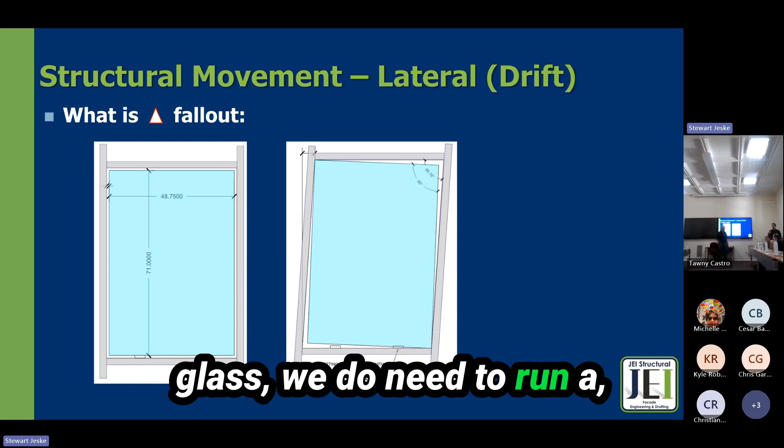Yeah, because if the architect is really saying no top cap, we want just the glass, we do need to run a Chapter 24 analysis - I think the IBC requires us to run one ply broken of the laminate. It's pretty much required anyway.

Yes, it's just a slide on, isn't it? Hey Stewart, can you hear me? I want to be quiet. He's from our team - can you hear me?

Ultimately you get into situations outside where you have wind screens, not just a handrail system - they become wind screens, very difficult to do with wind loads outside. So there is a requirement that we look at it. If it's a certain distance away from the building, we have to look at it as if it receives parapet loads. Does anybody know the difference between parapet loads and regular wall loads?

Parapets get huge amounts of suction loads on the outside, and a lot of positive pressure on the inside. So those parapets have to be designed to resist a heck of a lot of wind load. I think it's more than 8-10 feet or something like that - there was an article that said 6 times the height of the guardrail, so 6 times 42 inches. Anyway, there's a formula that at a certain distance away from the building, we have to design it as a parapet, and that becomes extreme with those types of wind loads.

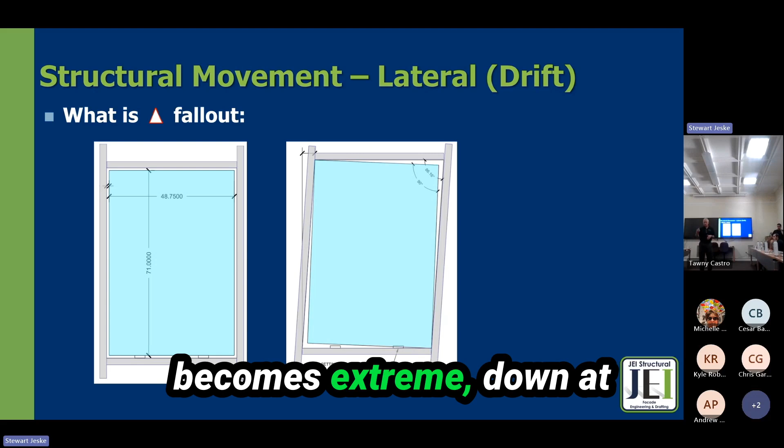In addition, the taller you push something up while trying to resist wind loads and all the other loads on it, it becomes extreme at the bottom. The thickness of the glass grows, and then the anchorage of whatever system you're using - probably a post system by that point - the anchorage of that post structurally becomes a nightmare, trying to get it into steel frame members and concrete members. You really have to look at those details closely.

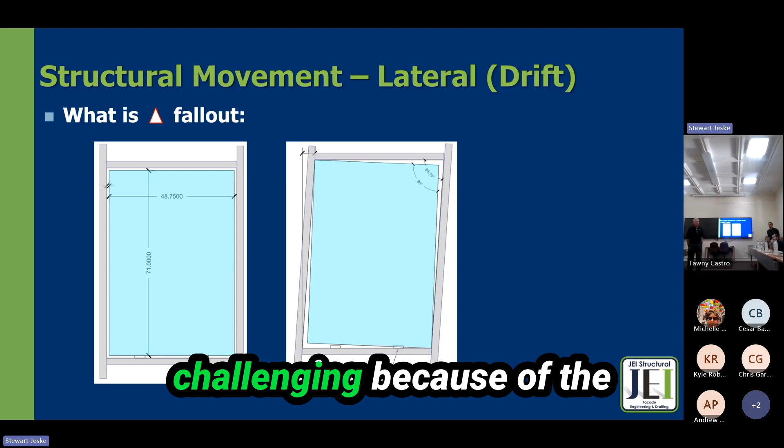Retrofits are especially challenging because of the availability of construction documents, and we sometimes have to make some assumptions. There are some concrete anchor companies like Hilti that are really good about this—they send out people to the field to do field testing for capacity, especially if we're anchoring into stone.

What stone? We don't have any values for stone. But retrofits can be challenging due to the availability of documents for us to use in calculations. Like Stewart said, for short little balconies that are only 4 or 5 feet from the face of the building, we're okay making a call that it's just the regular zone 4 or zone 5 wall pressure.

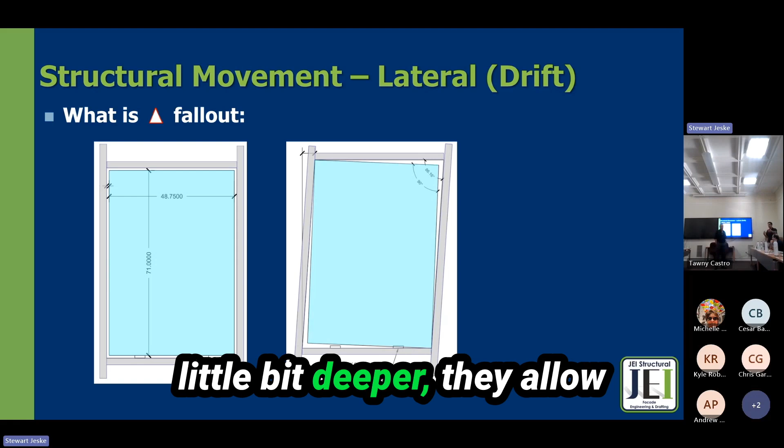Regular wall zone pressure. But if the balconies are a little bit deeper, they allow that positive pressure to build up and act in conjunction with the negative. In Florida right now, we're working on a project that went from 68 PSF wind load pressure—we realized the balconies were quite a bit deeper, and it jumped up to 123 PSF. Not even a 1-inch piece of glass can take that much load. So the depth and geometry of the balconies play a factor in how we approach it.

That's part of the engineering judgment we have to hang our hat on, some research or some paper. It's not like a prescription by code, as is the case with many things in this industry—we have to make judgments based on engineering concepts and knowledge. There are some prescriptive methods in the codes, but there's a lot of just experience and judgment that we have to apply.

Good questions—like early on with pricing. A lot of people looking at a job will work with the engineers, saying, hey, we have an issue, or we're trying to figure out the thickness of glass for a certain height, for example. Let's say we want to make them something—hey, we're going to use 3/4 inch maybe with a heavy base shoe, maybe a custom base shoe.

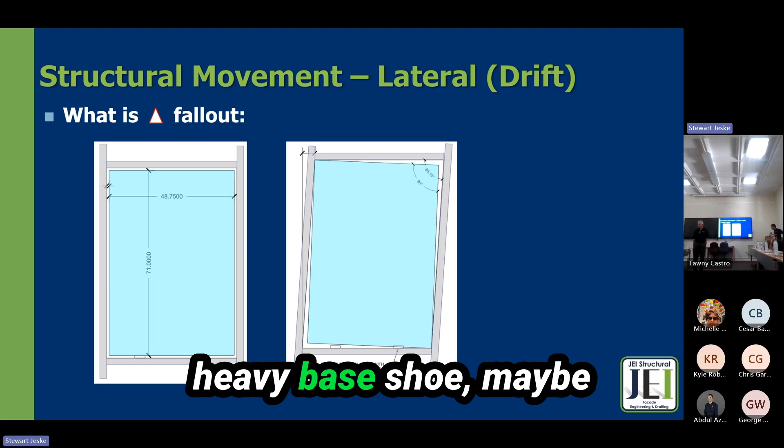But we don't want to take on that liability and just bid the job like that. When we turn it over to you guys, we get told, no way, it needs to be 1-1/8 Miami-Dade, and now we can't get the extra money. If we send that stuff to you guys early on, can you say, hey, in order for you guys to do this, you need triple Miami-Dade or whatever—that way we can make that assumption in the proposal, because if we size things wrong, we lose money on the project.

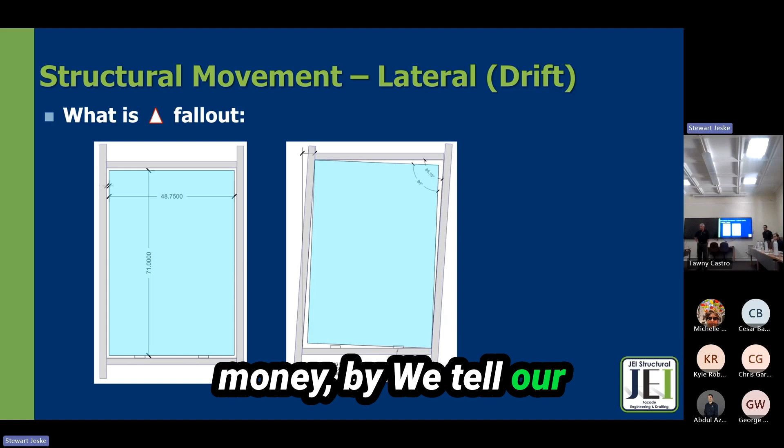We can, but it takes a small amount of engineering time to be able to do that. It might be a couple hours of us getting into our software program, plugging that in, and finding that out for you. So it's not like it's going to take up the whole project. It might be worth it to have that accuracy, because that's a huge difference in glass—you could save a lot of money.

Putting together a calc package does take some admin time to bring everything together, but a quick check, like Stewart said, is part of the preliminary services we offer. It's a marginal cost compared to the full-blown engineering for that system, because we're not looking at anchors—we're looking at the basic application of that glass and running a quick analysis with our finite element model to give you a quick answer, like, hey, you're in the ballpark, you can probably make it work—or no, just go with 3/4 inch. That definitely helps solve a lot of problems down the road.

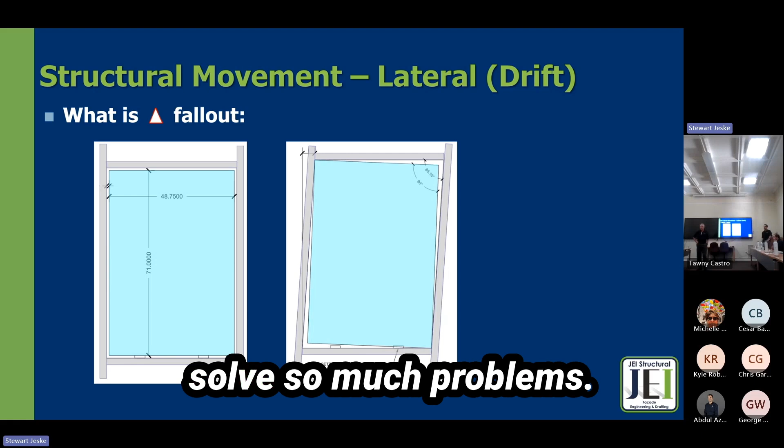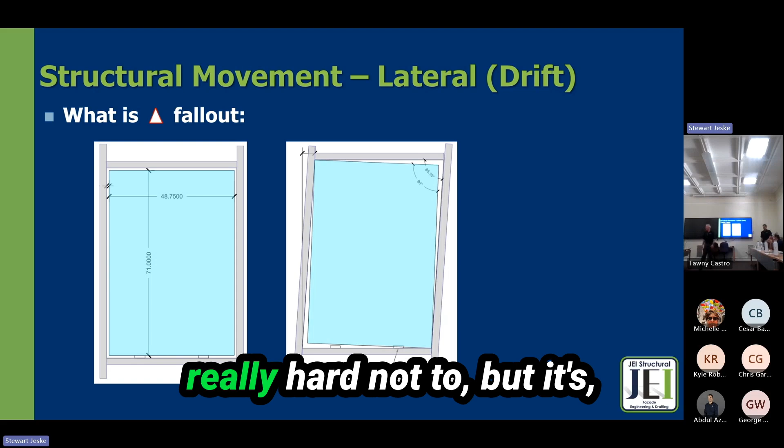You get into variability of wind loads too—design loads for buildings vary based on height and location and other factors. But ultimately, we also take on liability every time we issue any type of opinion—it's a liability to us as well. Engineers can be wrong sometimes, but we try really hard not to be. Our words carry some weight, and it's not always great to have that on our shoulders.

Yeah, we try to be accurate.